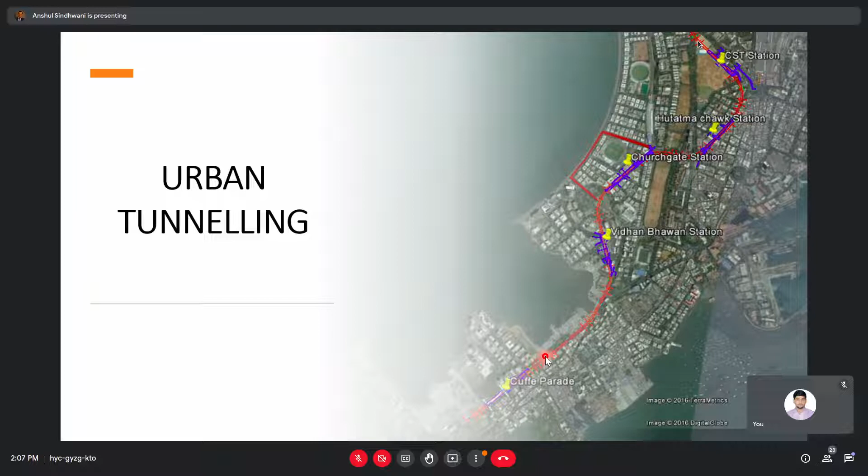If you see on the right hand side, this is the alignment. I'm mainly talking about the Mumbai Metro, but I have experience of a few other metro projects too, so I'll be speaking in general about the challenges and works associated with underground tunnels. This is the Mumbai Metro package one, Cuffe Parade, Vidhan Bhavan, Churchgate, Hutatma Chowk station, and you can see the Arabian Sea is very near to one specific location. In general, the entire alignment is very near to the sea, so there's a predominant challenge that water could be a big issue in our case scenario.

So what exactly is urban tunneling? There are different applications associated with it. We have metro tunnels, we have transportation tunnels. Within Mumbai itself, all sorts of applications of tunneling are currently being executed. If I talk about metro, we have Mumbai Metro Line 3.

If I talk about transportation tunnel, we have a coastal project running below the Marine Drive. If any of you have seen Marine Drive, it's basically below the sea. We are building a tunnel with a diameter of 12 meters. L&T is building it, so it is one of the largest TBMs being deployed at the project. Then we have utility tunnels being executed currently by MCGM for water transfer and sewage. So all sorts of applications are there.

Then we also recently started with high-speed rail in Ahmedabad. It is again a big project, yet to be started specifically for the tunnel, and we'll be having one of the largest TBMs of India deployed as on date, around 14 to 15 meters in diameter. So all sorts of aspects are there.

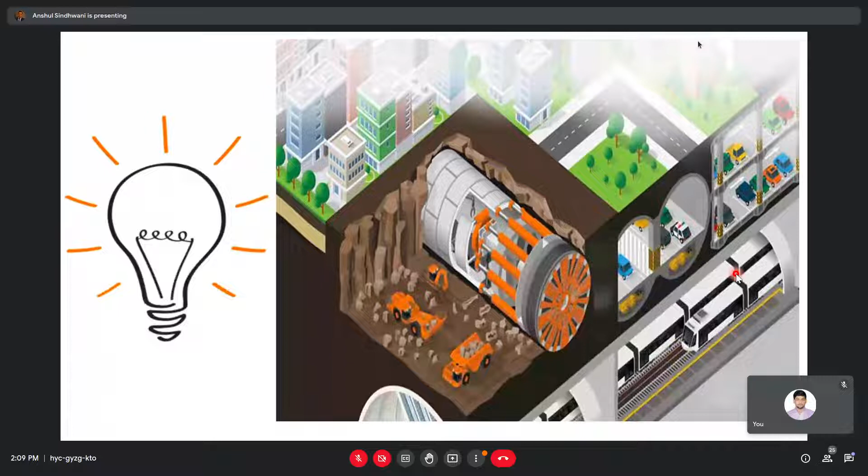Today I'm going to cover metro tunneling in general. The major facts we need to remember before, or for any application of tunneling project being executed in urban areas—what are the main key points? The ground surface is a unique challenge which we need to keep undisturbed, because the public is staying on top; if there is any settlement, everyone will be in a panic scenario, and there can be very serious consequences.

Then we have utilities—specifically in Mumbai, we have utilities where even the owner doesn't know which utility is going from which location to which location, because it was laid around 80 or 90 years back. So it's a big challenge which we need to see.

Then we have a risk mitigation plan. Even though there may be a settlement or ground issues happening, there has to be a risk mitigation method at the same time. Before starting the project, we need to have a plan for if a scenario is happening, what is the probability of that event, and what is the risk mitigation plan in advance, because we are working below existing buildings and on live traffic roads, so it can have detrimental effects.

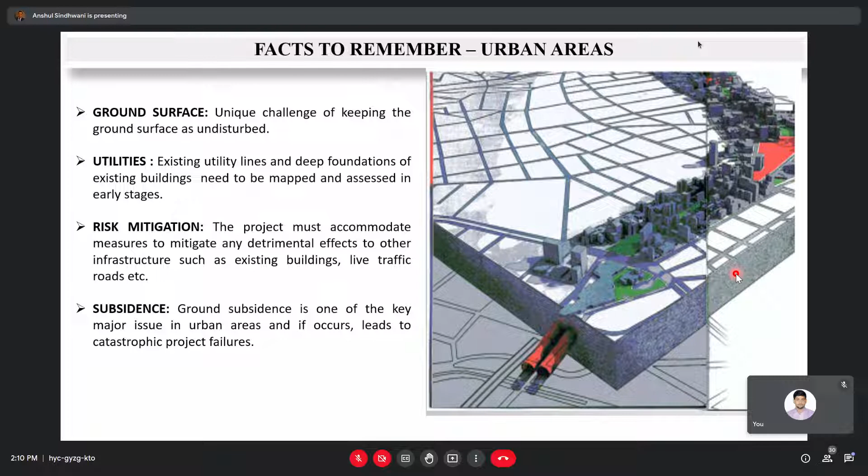Then there's subsidence, which I've already talked about. It is one of the key major issues in any urban area. I've worked in many cities, and everywhere the problem still remains the same. Although, if we have a risk mitigation plan in advance, we can always avoid these project failures.

Talking about ground subsidence, you can see these images from top to bottom, left to right. Everything is involved in and around the urban area. On the right hand side top, this is Bowbazar in Kolkata. Recently some issues happened last year during the pandemic. On the left hand side, both images are from Chennai Metro Phase One, and this one is from a foreign project.

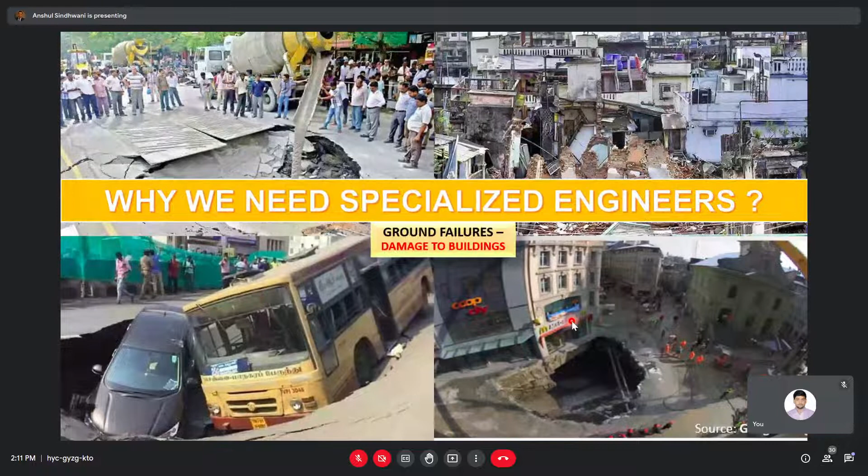What you can see is that the public is involved, buildings are there, traffic is there. So at the end of the day, it's a risk to the public, and we need to avoid that. How can we avoid that? We need specialized engineers, from mining, mechanical, civil, geology, geophysics. Every engineer makes up a team to make the project a success.

I'll start with the typical stages of construction within urban tunneling. We have a retrieval shaft and a launch shaft. You can also call this station one and station two. One station is the launching shaft, where we'll lower the TBM, and the other is where the TBM will be retrieved. At the end of the day, you will have access as a passenger from this side, and access as a passenger from the other side as well. So basically, there are two stations.

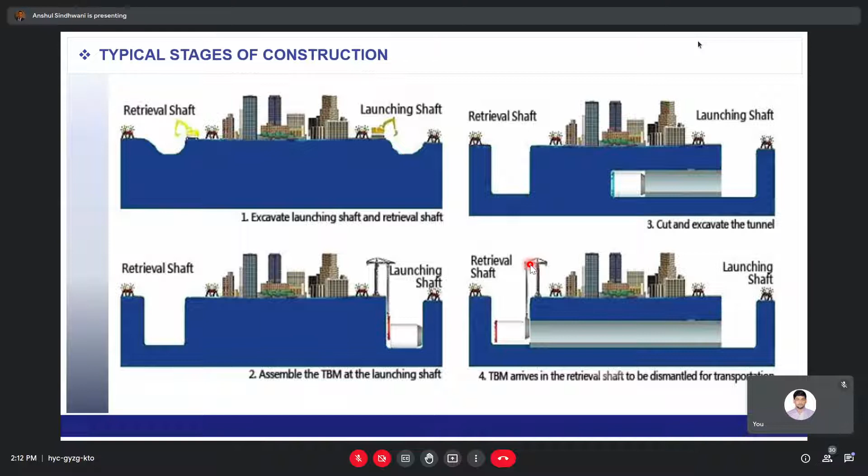How do we do it? Step by step, you need to excavate the launch shaft and retrieval shafts. Once the excavation is done, you lower the TBM, assemble it, and drive it. Once the drive is completed, you retrieve the TBM. This is the basic stage of construction usually followed everywhere across India and across the world.

So the basic layout, talking about a station, has a launch shaft and retrieval shaft. These shafts are just part of a station. This is a cut and cover box, which we call an underground station, where you'll have access at a later stage to enter and go from one place to another. At each end, we'll have either a launch shaft or a retrieval shaft. Specifically in urban areas, in most cases we'll have buildings on both sides, left hand side and right hand side.

If you see the bottom image, it's a section indicating the excavation stage, where, like in case of Mumbai, we have a rocky strata. Up to the point where this rock starts, we'll have pile systems, which we call retaining walls. It can be a secant pile wall or a contiguous pile wall, depending on the ground in different cities. Specifically in Mumbai, we've used secant piles, which we bore up to the rock, and then from rock level we'll have an open cut excavation.

Then you can see the westbound tunnel and eastbound tunnel. Basically, two TBMs will be driven from these locations.

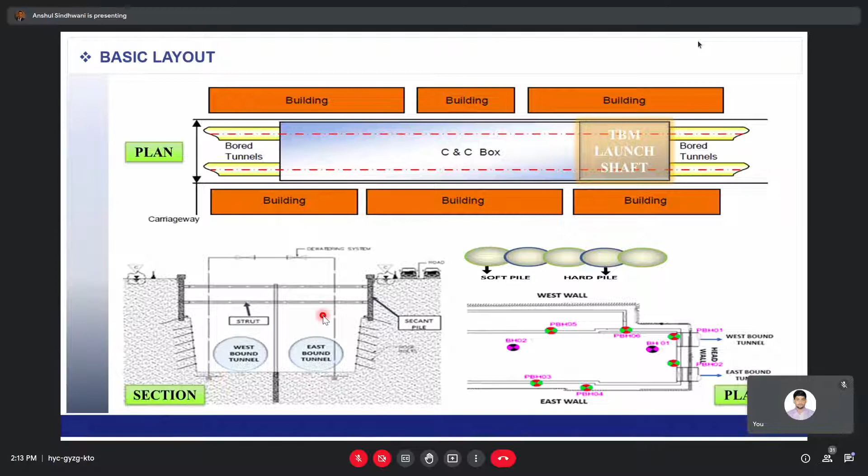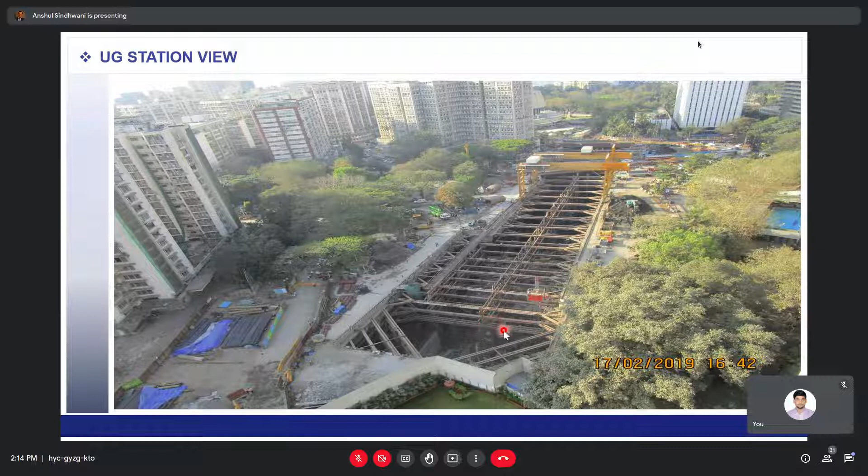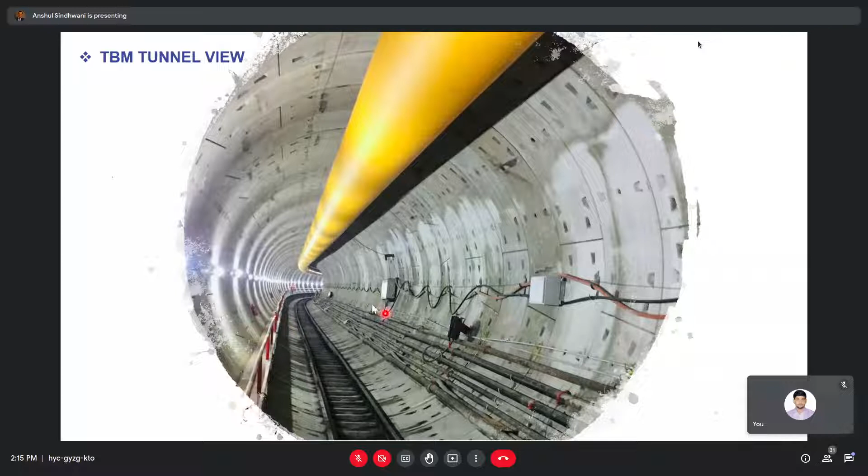Like I have specified in the previous slide, there are a lot of engineers from different backgrounds which make one team. We need people from geology, civil, mining, mechanical backgrounds to form the composition of one team which can drive the project.

If I talk about the specific activities where we exactly need them, we have a topographical survey where buildings, roads, trees, manholes, poles, and cables are mapped for future reference. Also, when we are building or excavating anything, we need an exact location of where this particular building is, how far it is from the center line of the tunnel or from the station edge.

Moving on to the next activity is geotechnical investigations. We do geological and geophysical surveys during different stages of the project depending upon requirement. Geological mapping is done for the open slopes and specifically along the face of the TBM.

We also have a building condition survey, just to see the condition of buildings next to the project location. Then we have instrumentation, and station and tunnel construction. I'll be talking about all these activities in detail in the next slide, so you can wait a while to understand exactly what I'm talking about.

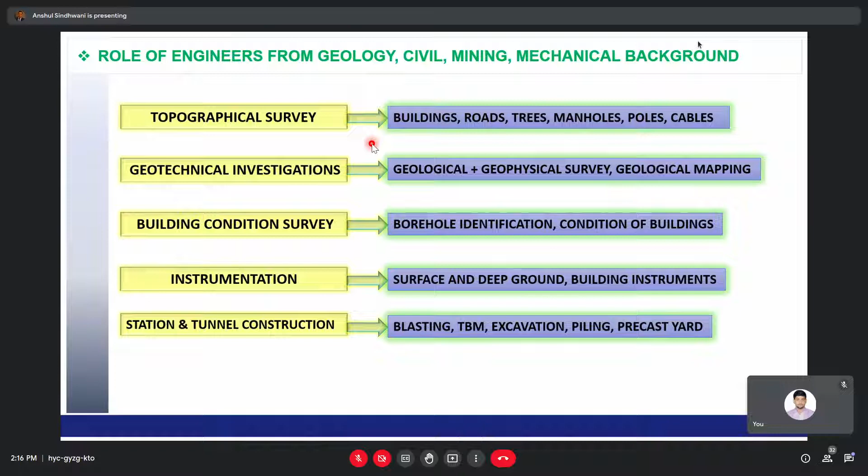Many of you, since you're already from a tunneling background, might have basic knowledge of this, which I'll explain through this urban tunneling case study. The previous section talks just about the activities - this is a sequence I have created to understand how exactly we start the project.

So for any project, first we do the topographical survey - if you see the right hand side image, everything is marked. Then we do geotechnical investigations and building condition surveys. If you see, different numbers are allocated to different buildings.

This is a unique identification number we create so that when we start the project, we understand how exactly this building is - how high it is, how many floors, what is the foundation - so that whenever the TBM is passing through, we understand in advance what precautions we need to take care of. Then we need building repairs and support.

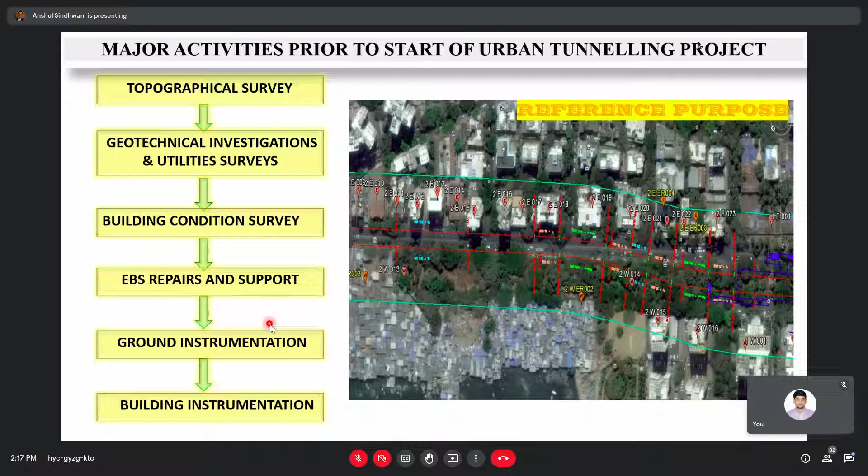Like I said, there may be cases where the building condition is not good, so we need to have some repairs and support as well. Then we have ground instrumentation and building instrumentation.

For the geotechnical investigations, you might be aware of the basic drilling procedures and laboratory testing we do. I'll be talking about those things in a bit more detail in the TBM selection part.

These images are shown just to indicate how exactly geotechnical investigations can help you plan for tunneling performance, or to understand how much probability there is of ground failures happening. I have created these images in a sequential manner so that once we are moving from station one towards station two, we can see how exactly the geology is changing.

If you see the first image, what we can see is above the TBM top ground. There is a layer named shale with tuff bands, whereas our TBM tunneling is in grade one, grade two, grade three basalt only.

However, as we move further, what we can see is along the longitudinal direction, this shale and tuff band is dipping towards the tunnel alignment itself, and it is moving down. So this particular case scenario is ideal, where we don't have any soft rock, or I should say fractured rock, in the face of the TBM.

Whereas on the other side, this particular image shows it becomes a mixed face. The point I'm trying to bring out here is, if you don't do investigations with proper planning, you will end up with something else which is not exactly what is being mapped during the tunneling stage itself.

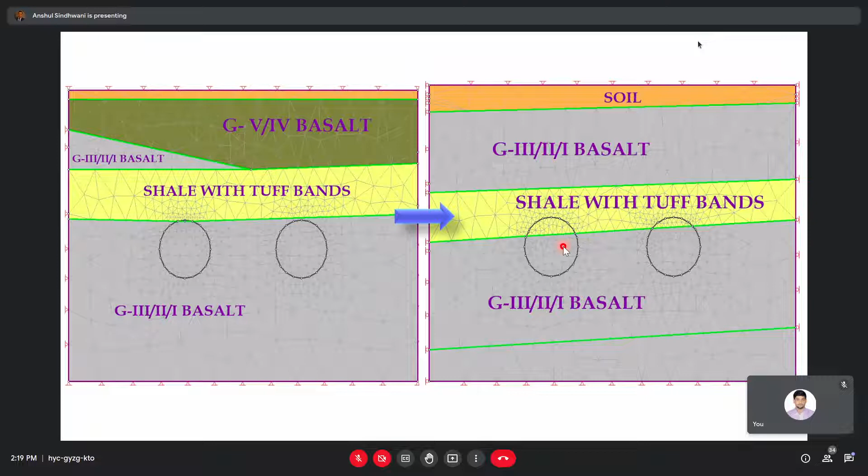So these are the two images. If we move further, you can see this layer has gone below the invert. If you go back from the first image and interpret up to this image, as we are moving forward from the TBM, this particular fractured ground is dipping downwards, going down, down, down, until it goes below the invert of the TBM. And then in the next image, this has disappeared completely.

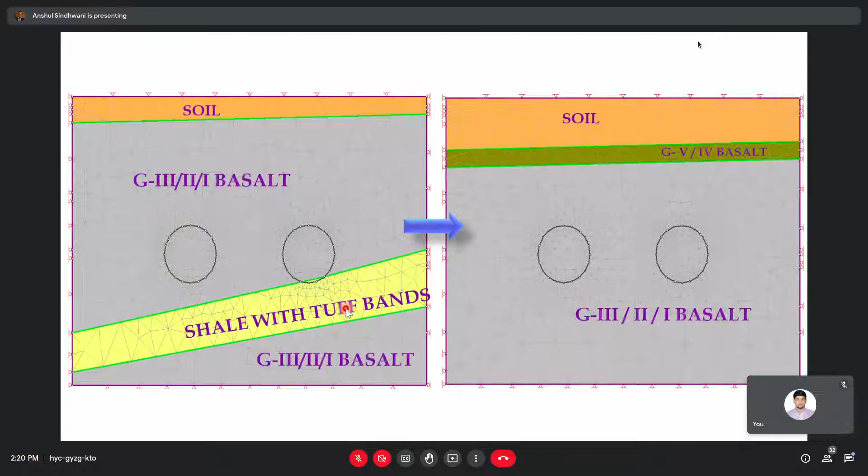In actual ground, it would have gone beyond the borehole depth. Within this borehole depth of 30 meters, it indicates that this layer is no more. Now, as we move further, there is another section where this particular fractured rock has appeared again, but with more fractures in it. And then if you move forward, there is another layer which has added to it.

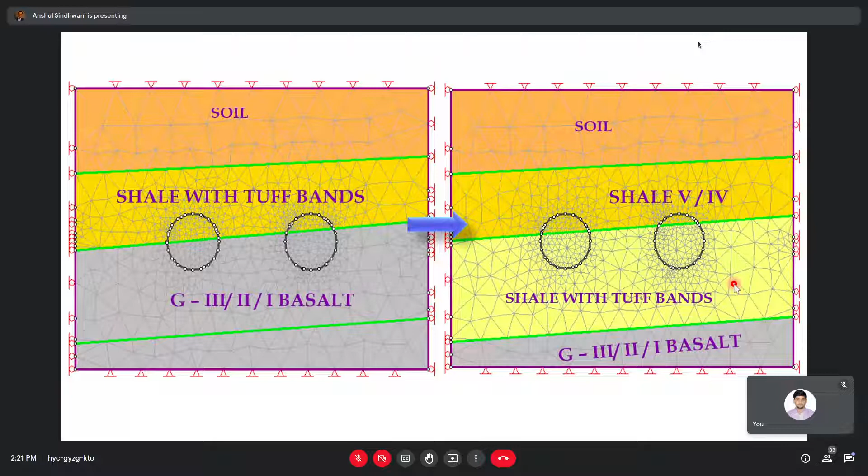In real terms, this is just a 500 to 800 meter alignment I'm talking about, and within that 800 meters of tunneling, you can see exactly how the geology is varying. So the point to bring out here is the importance of investigation. If you don't have a detailed understanding before you select any TBM, it would basically be a plan for catastrophic failure later.

So now I'll talk about the TBM selection part. Here I'll talk about which exactly are the parameters we look for during the geotechnical investigation stage. In Mumbai, we used a crossover TBM, which is a dual mode TBM, first time being deployed in Indian conditions. I'll tell you the difference between the TBM we are using and in general how it is being used. This is just a general classification of TBM types, which most of you might have already studied. We have rock type TBMs and soft ground shield TBMs.

Specifically in Indian cities, the majority use EPB and slurry shield TBMs because of the soft ground conditions. But cases like Mumbai and Bangalore use rock TBMs quite a bit. Majority of cases use only EPB and slurry shields, which can also be used in specific rocky conditions, but for Mumbai specifically, majority have used rock TBMs because we are working in Deccan traps, which is dominated by rocks.

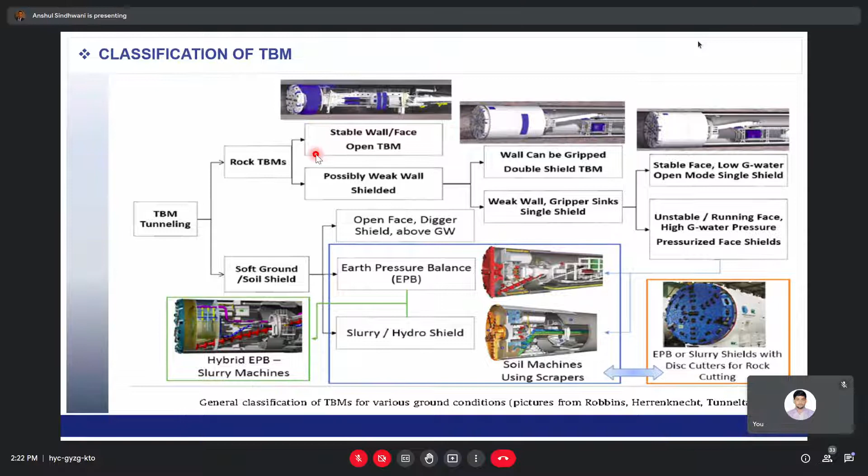Now, coming to the parameters most important for TBM selection, there are two categories. One is ground condition, and second, based on these ground conditions, the TBM operational parameters we look for. In ground conditions, we have intact rock characteristics and rock mass conditions. For intact rock, we need strength, toughness, hardness, drillability, brittleness, abrasiveness, Poisson's ratio, elastic modulus, and more like porosity and grain size, which are basic to it. And then rock mass conditions.

In cases like urban tunneling, you don't get to see these rock mass conditions because there is no rock mass exposure. If you go to any hilly terrain, you can map the slope next to the tunnel alignment and have some sense of understanding. But in urban tunneling, all you have are boreholes going down to the tunnel alignment. Anyhow, basic things you can understand, like exactly what the spacing is.

It could be referenced from the RQD which we calculate, it can be related. Then the dip amount - generally we get to know the amount of dip from the core, how much angle it has with respect to the horizontal. So basic things you can understand, but unless you have exposure, it's hard to get before the project starting stage in urban tunneling.

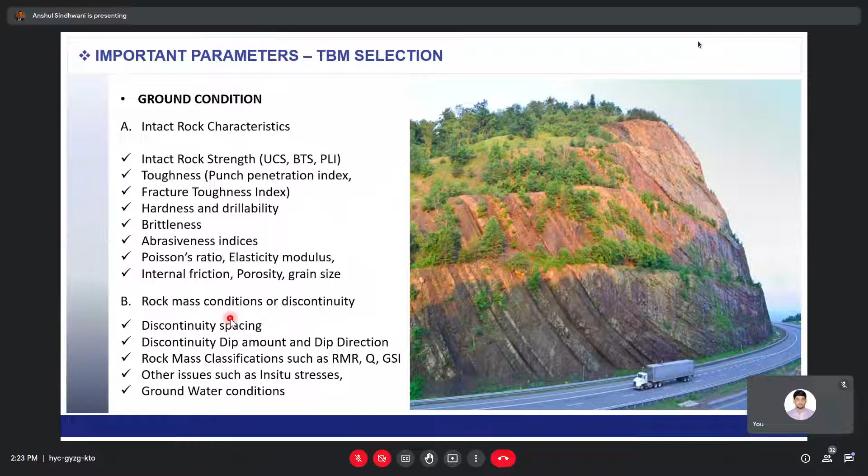Now, moving on to TBM operational parameters - thrust force, torque, RPM, power - these are highly dependent on the ground characteristics. Unless we have an idea of the previous section, we cannot get into these parameters. But as a holistic view, these are the parameters we look for.

Number of discs - if I talk about a very specific case scenario, the disc cutters we are using in Mumbai are 17-inch disc cutters. It is fair enough for rock of strength up to 150 MPa, but in cases like Bangalore, where we have very hard quartzite rock with very high abrasivity in nature, the experience in the phase one Bangalore project was that 17-inch disc cutters didn't work well.

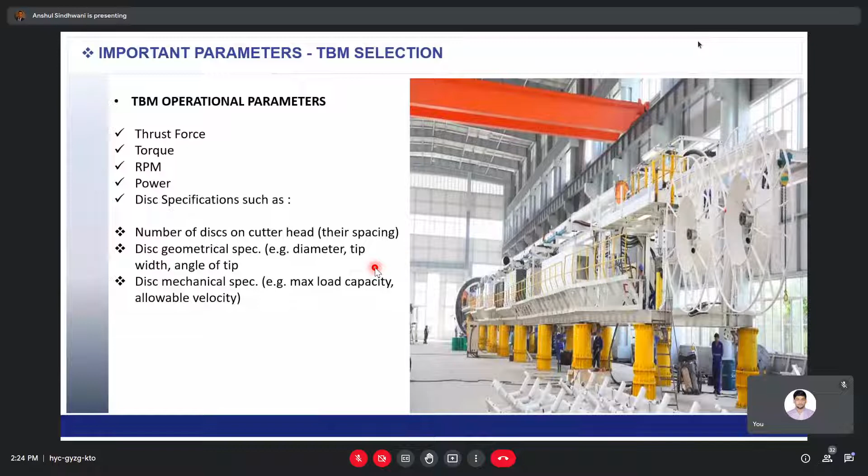So this time, as an L&T, we are using 19-inch disc cutters. So that is how a dependency on these disc cutters can have on individual projects.

So what we are talking about in terms of key parameters when we look for any TBMs: what is the maximum advance speed penetration? This will reflect the planning of our tunneling construction schedule. Until we have values attached, this comes only when ground characteristics are available. Then what is the range of speed of the cutter head, the main drive torque range, power of main drive, total thrust force, total number of cutters, how many gauge cutters, how many face cutters, how many center cutters. All these details you need in advance.

So you might be aware already there are many TBM manufacturers. I've named just a few which are mainly involved in Indian tunneling: Herrenknecht, Robbins, Terratec, CRCHI, CREG, Lovsuns. In fact, I've worked with at least three or four of these, and these are the major players I've seen personally in India.

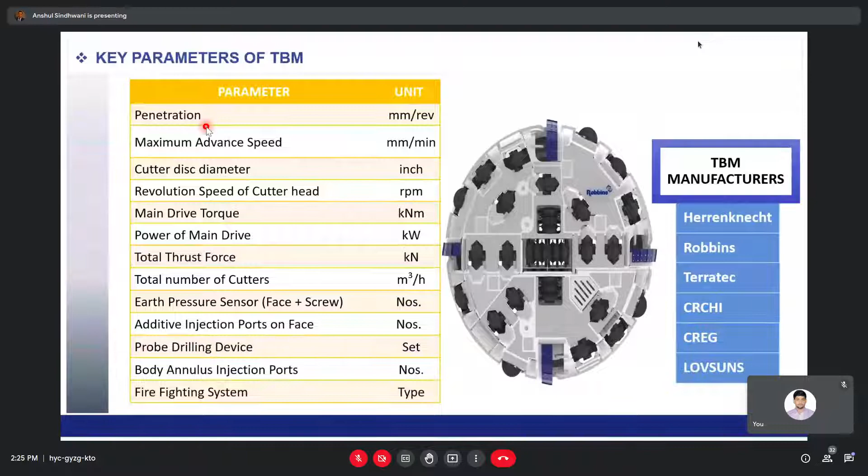Moving further, as I said, these key parameters are basically derived from the ground characteristics which we get. Technically speaking, there is a back calculation for how much advance you can do within a day, a week, or an hour, based on these TBM performance prediction models.

But personally, what I've seen in the construction industry is that the construction schedule is way beyond these performance model parameters, because it is more dependent on logistics than on mucking. Like in the case of Mumbai, our muck is disposed 60 kilometers away from the project site. So even though we have more mining meterage in advance, we still won't be able to dispose of the entire muck, and therefore the TBM will sit idle.

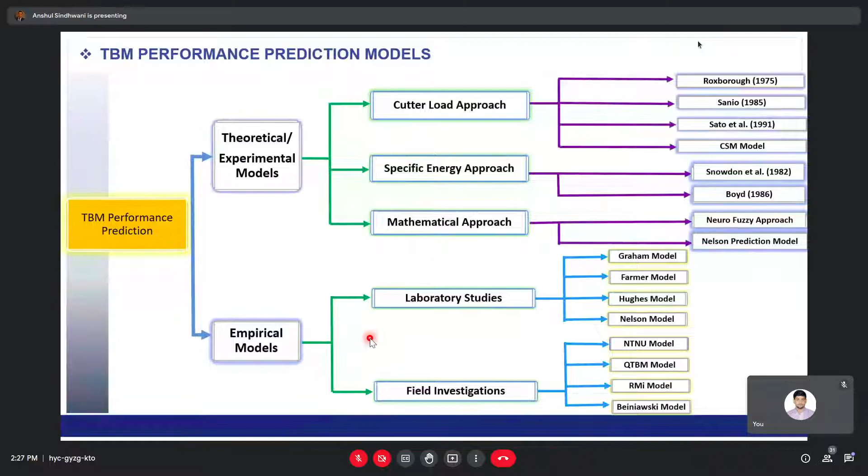But in any scenario, if you want to have a rate of penetration or advance rate in advance based on ground characteristics, you can use these models. There are theoretical, experimental models, and there are empirical models based on laboratory and field studies. You can use a combination of all of these based on the availability of ground parameters that you have covered in the investigation part.

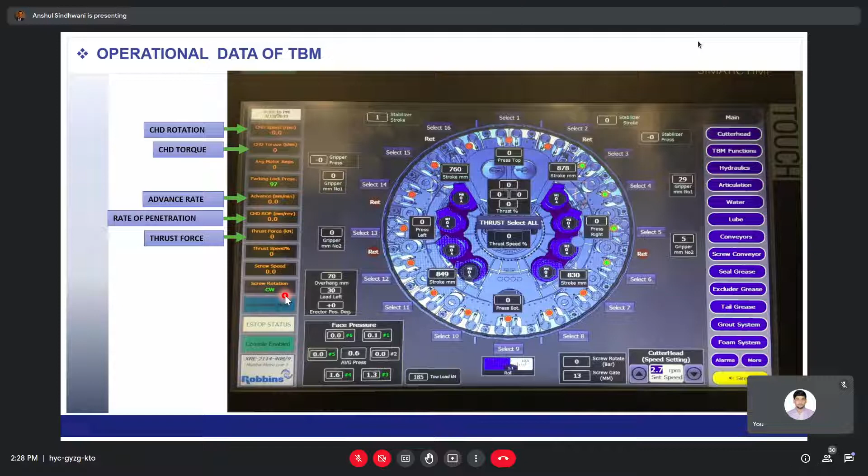So this is just a different view. I've taken majority of the parameters which I listed in the previous section, and they're again noticed here: cutter head speed, torque, then you have advance ROP, thrust force. So whether you're a mechanical engineer, a mining engineer, or a geologist, these are the parameters that can give you a lot of idea of what exactly is happening ahead of the face and within the face itself.

So moving on to the next topic, it might be a unique or different topic you might not have studied as of now. Building condition survey, as I've spoken earlier, is basically to understand the existing condition of a building before the start of the project.

If you don't do a survey of these buildings, you cannot go out and execute the project, because people will come and say, 'Because of this metro, our buildings are shaking every time,' which might be a case, or may not be. That is what you need to identify in advance, which we call structural audit and building condition survey. I'll speak about this in detail now.

The first activity when you go into any project is the tunnel alignment. You mark a 50-meter zone from the center line of the tunnel towards both ends, westbound and eastbound. This 50-meter zone is the influence zone written in the contract of every underground metro project across the world.

This basically means that even in the worst case scenario, with soil ground conditions having flowing ground, the maximum extent it can affect is 50 meters. So this 50 meters is taken as the worst case scenario, that whatever the ground conditions beyond this 50-meter zone, they will not have any impact.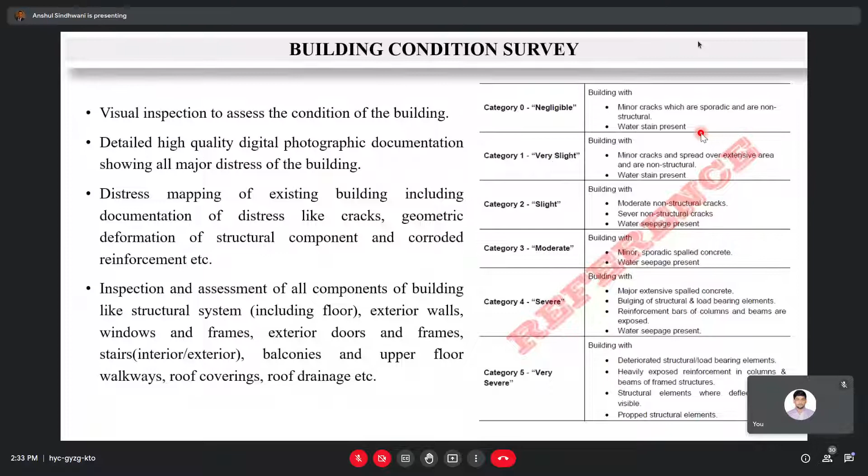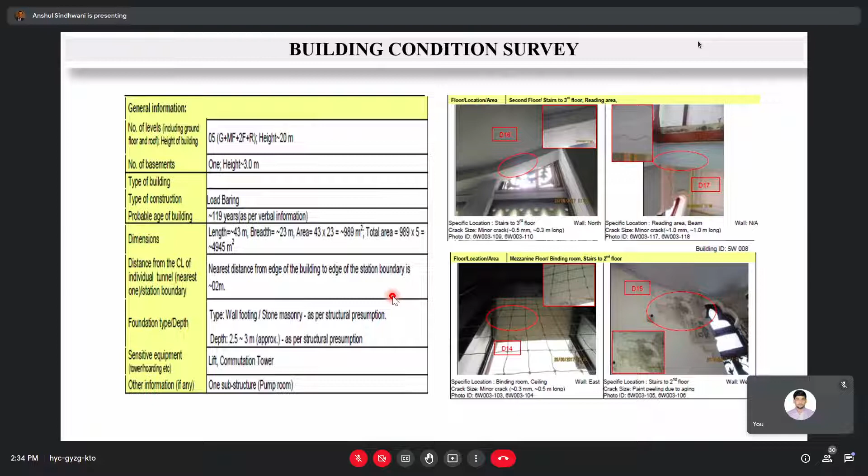At the same time, these are the same parameters I talked about - distance from station boundary, foundation type, depth - again a structural presumption. If we don't have details available, we do physical checkups of the foundation. I'll show you in the next slide.

In Mumbai specifically, we have heritage buildings to deal with, which are almost 120 to 150 years old. Nobody has the detail of how exactly the foundation is. So our designers have marked it specifically by digging a trench. They have come and visited and seen what exactly is the type of material used in the foundation. For heritage buildings, this is the sort of foundation they have used. So this is also a way to do it.

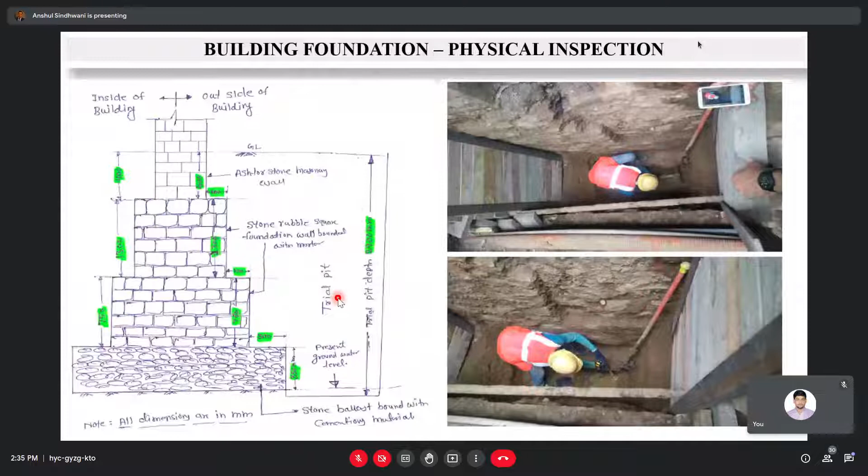Nowadays, if we have high-rise buildings in Mumbai, we know it will definitely be on a pile foundation. So some basic understanding is also required. Otherwise, trial pits are always the best way to understand what exactly the foundation is.

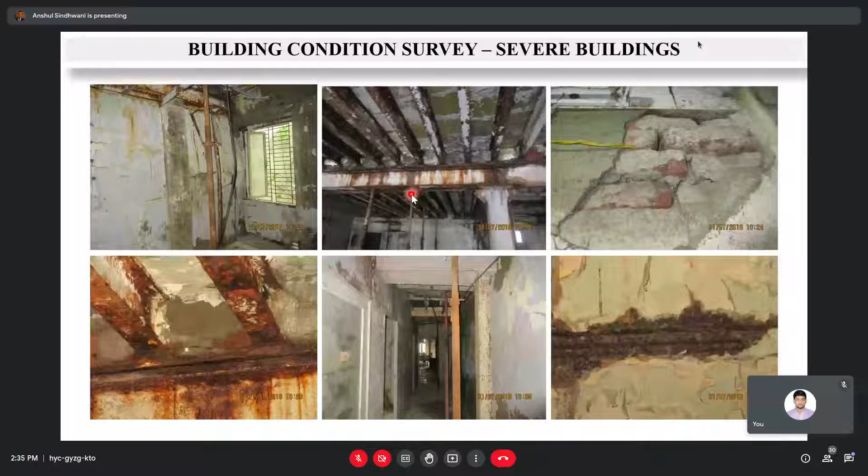So I was talking about severe buildings. You can see these damages we have identified in some of the buildings and categorized as very severe. You can understand that without even any project construction, these effects already exist. Imagine if we have a tunnel below these buildings, what adverse effects it can have on them.

So this is again one of the important categories. Along with the buildings, we also need to identify these bore wells or wells in advance. Many cities like Delhi, Chennai, Patna or Ahmedabad have bore wells within every building for water supply. When we plan these alignments, nobody knew that these bore wells are next to the tunnel alignment or in front of it. So these bore wells need to be plugged before the TBM arrives, and we need to have a separate arrangement for the owner. In case of Mumbai, we don't have bore wells because we have rocky strata here, but...

We do have many holy Parsi wells, which are open wells without any foundation. They are basically within the sandy or soil strata of the ground, and open from the bottom, so you can have ground seepage when tunneling. These wells you cannot do much about because they are holy wells. Since it is rocky strata in Mumbai, usually the probability of any ingress happening within the well is less, but these still need to be monitored. In case there is a seepage within the TBM, the water level will go down, and people will panic. So the point here is these bore wells and wells need to be identified along with the buildings when we are doing this building condition survey.

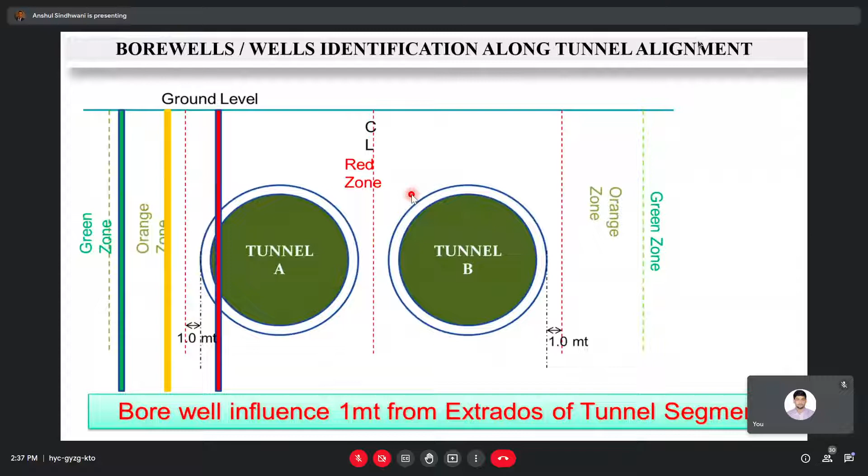So I was talking about the structural audit. We usually don't do a structural audit for every other building, only for buildings that we feel are very severe, very near to the tunnel alignment, and will have an impact for sure. What we do is ultrasonic pulse velocity test, then rebound hammer test - people from civil engineering can relate to these tests. Then we have a carbonation test, then a half cell potential test. Basically, we go inside the building, take a core from the concrete, and do some testing to come to a conclusion on how severe it is.

At the same time, the detailing of the cracks which we have done in the building condition survey - this is the advanced version where you see the extent and the exact critical component of that building marked, which needs to be treated. So basically, the structural audit doesn't just tell you the condition of the building, but also where exactly you can do additional propping or repairs so that the building can have substantial strength to allow the project to proceed. If you dig below this building, we know there will be an impact for sure, so we need to determine what additionally we can do so that we can do the tunneling. Some supporting and repairs are required - this structural audit tells us where exactly you need to prop or repair it.

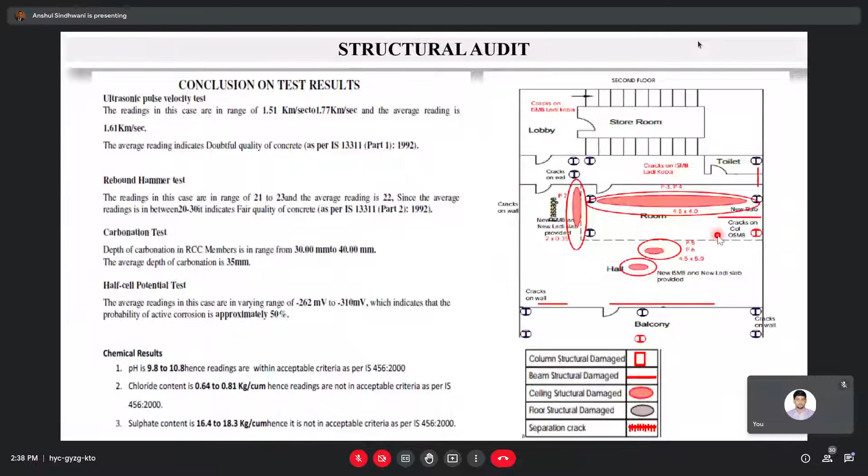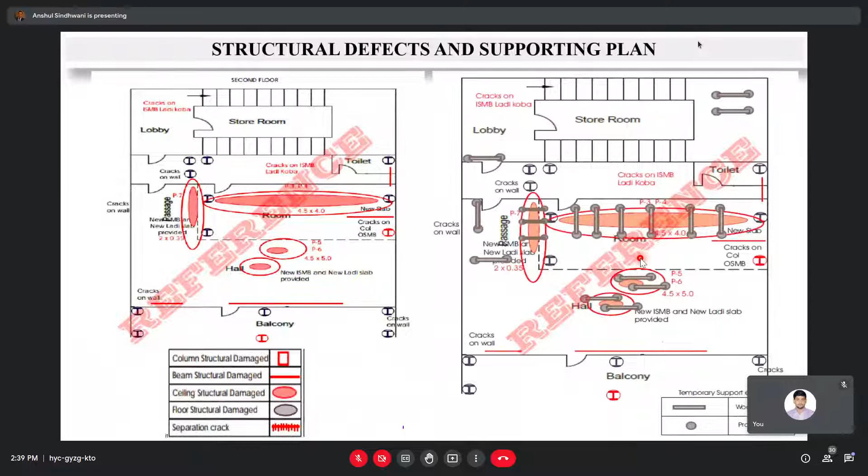Once this building condition survey is done, identified defects completed, and ground investigations completed, we do the ground movement and building risk assessment studies. This is the second stage. Think of it this way: we have buildings with their own condition, and we have ground which is of a specific type. When we do tunneling, these two things basically interact.

If it is a soily ground and these buildings are already in a severe condition, tunneling in soil ground will have a tendency to settle more. Whereas if you have a rocky ground and the building category is still critical, you will have less impact because the ground is strong.

In this particular case scenario, we do the ground movement studies and then we categorize these buildings through a risk assessment approach, where we identify what exactly the ground will have an impact on the building.

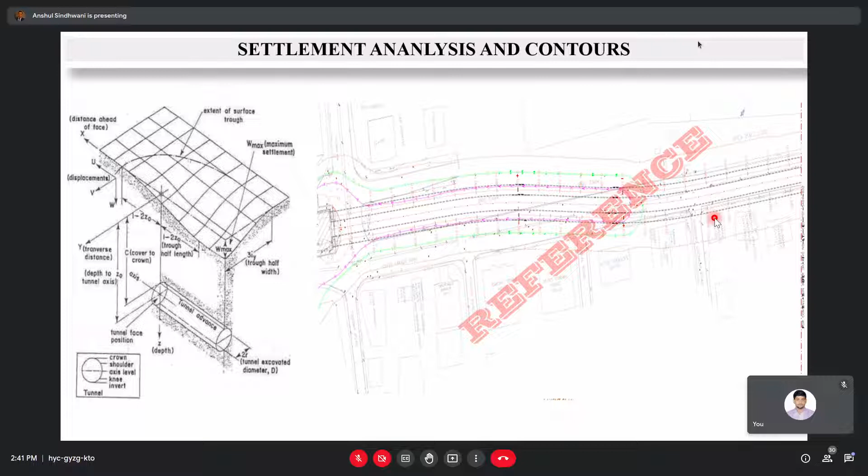Now imagine if you have a building here with a 1 mm settlement - even though this building is in a severe category, it will not have any impact. So this is what we do in settlement analysis and contour plans. We mark these contour lines all along the tunnel alignment, and then identify which buildings can have an additional impact based on our construction.

This is the building risk categorization I was talking about. Based on this categorization, I plan my instrumentation, ranging from negligible to very severe category. Green indicates no preemptive measures are required and we can have a basic instrumentation plan, whereas the red category indicates the building is so bad that we need temporary or permanent evacuation, or in some cases demolition of the building if required.

If demolition is not possible, we need enhanced instrumentation and monitoring - it could be a real-time approach or a different way of doing it. Then we need a temporary repairs and support plan, which I discussed in the previous slide. This approach gives us a plan for doing instrumentation within these buildings and what support is required.

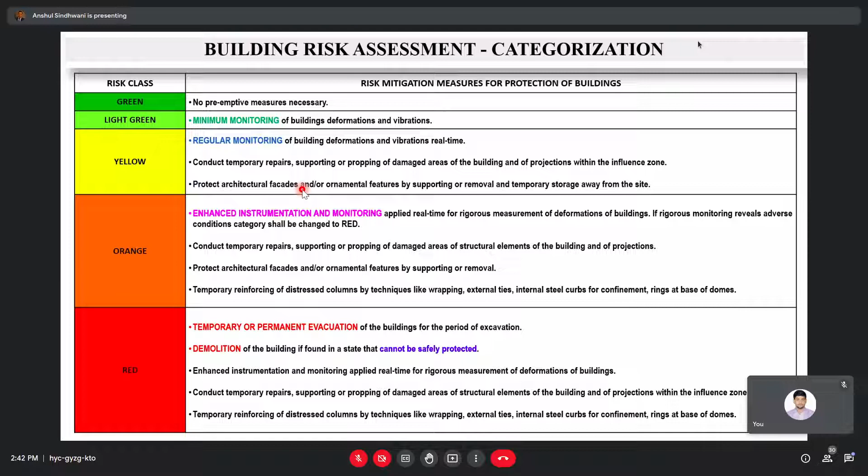Moving on to building support and repairs. Imagine you've done the studies already and concluded that supports are required within this building. What sort of support? On the left hand side, this wooden batten I was talking about in the previous image, discussed during the structural audit, is being supported here.

We have heritage buildings here, with a station excavation up to 30 meters. This building is just 2 meters away from our secant pile alignment. These arches have a tendency to either converge or diverge based on the excavation - this is the probability we thought may expose this issue. So we have supported these arches using I-sections, ISMB sections, so that it can have structural strengthening.

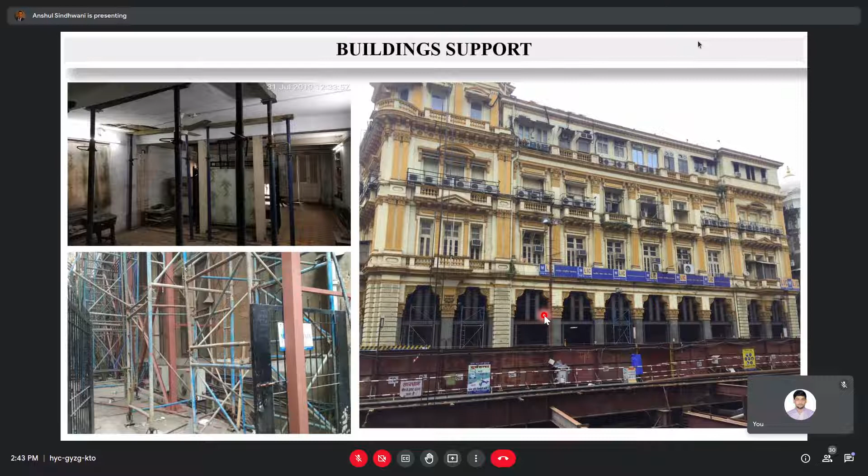I was telling about the heritage structures of Mumbai - you can see we have these finials. These are UNESCO identified heritage buildings, so they have a unique finial or structure type. These finials are being supported by putting some counterweight here. The same thing is done here - this is just a bird's eye view.

This is a close view of the arch support, and this is a projection that people building the heritage structure added long back. These projections need to be supported because, imagine, we have done blasting just next to these buildings, so these projections have been supported so there will be no fall below.

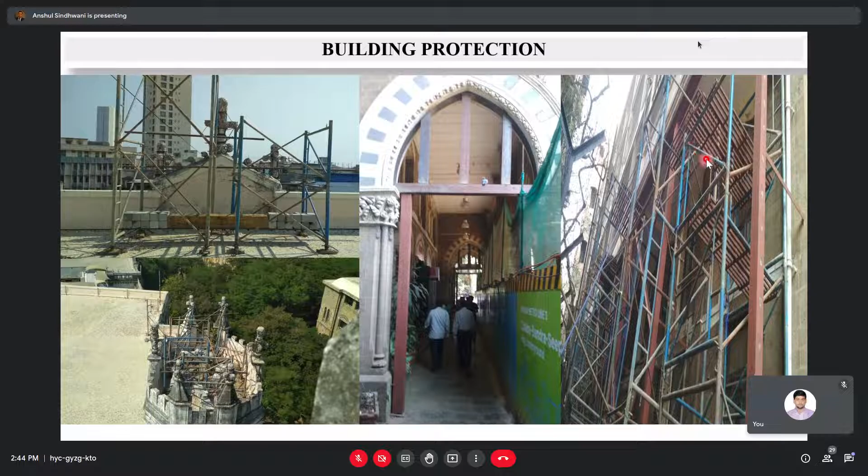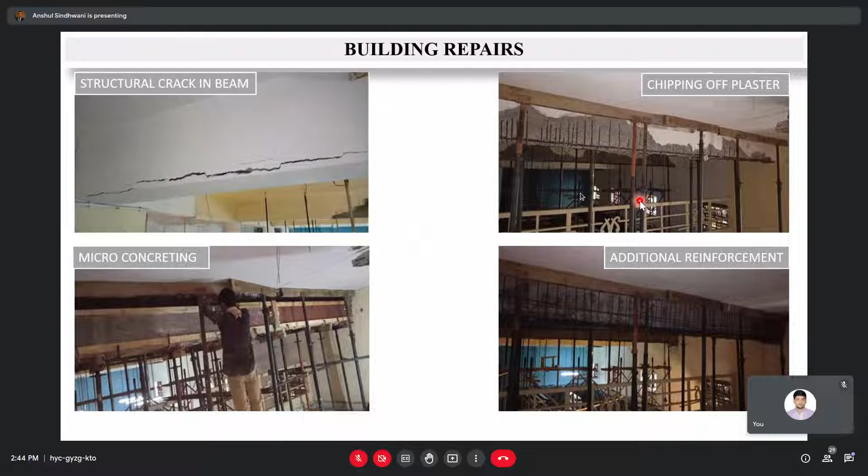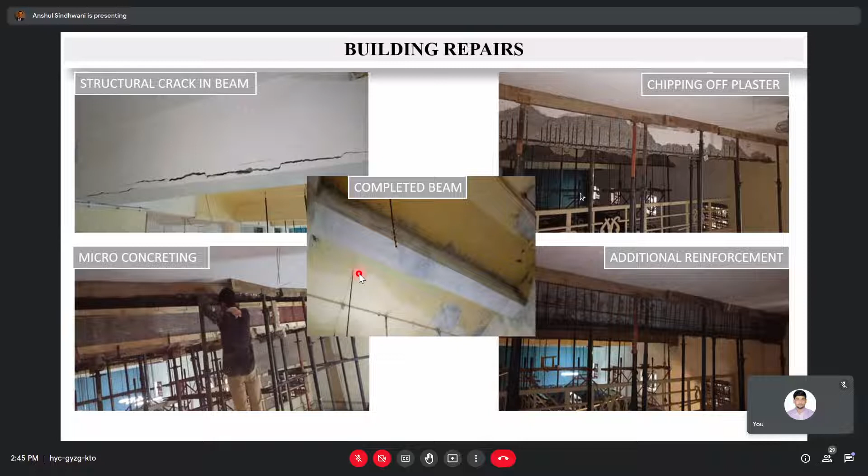We have also done repairs for a few buildings which we concluded were very severe and would cause further deterioration to the structure. So why not repair it in advance? This is a basic path flow in any underground project. There was already a structural crack in a beam, which is major for any building since these beams take the load. So we chipped off the plaster, did additional reinforcement, and did the concreting. This is the final result. You can imagine how deeply we need to dive in just to save the public and make these buildings safe and free from any effect due to construction.

Now I'll talk about the instrumentation and monitoring part. This is divided into different categories, in the sense that we need to monitor buildings in the vicinity, but at the same time, what we are digging for stations also needs to be monitored, like the open rock cut slope, piles, retaining walls, and struts in between. All these structures need to be monitored because the workers inside the station also need safety. If anything happens within that station, it will ultimately impact the buildings in the vicinity.

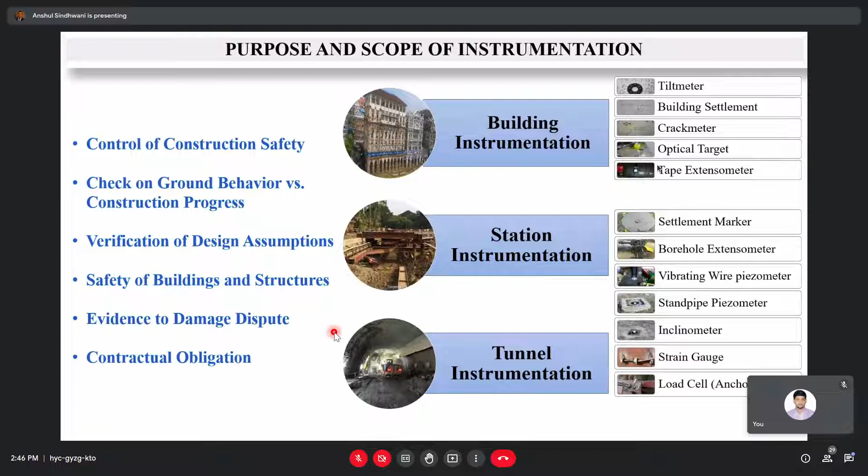And then we have tunnel instrumentation. The basic objective of doing this instrumentation is construction safety, checking ground behavior and construction progress, verification of design assumptions, safety of buildings and structures, and evidence for damage disputes. This is a major thing because people tend to say that wherever metro works are going on, any damage is only because of the metro. That's not usually the case every time, so this instrumentation data gives evidence for any damage dispute in the future. And then it is also a contractual obligation.

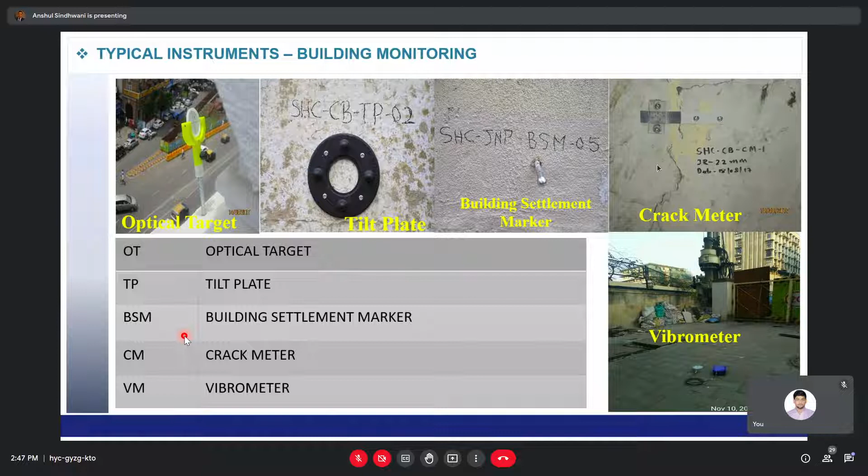So for buildings, what exactly are the instruments we use? These instruments remain the same; the point is whether you do it manually or real time, which depends on the project. In Mumbai we have done both manual and real time, whereas in Chennai and Delhi it has been done mostly in manual mode, but for some specific critical buildings we have done real time as well. So the point is, what exactly are the types of instruments we use?

First is the 3D target, which gives you a three-dimensional view or three-dimensional coordinates of the building wherever we usually install it. Let's say if it's a 10-floor high-rise building, you put it after every 3 floors — so at 0, 3, 6, 9, and then on the roof.

Then you have a tilt plate, which is basically for bidirectional understanding of a building. Let's say if you are doing excavation in front of a building, there is a tendency for the building to tilt towards the station direction. So we install these tilt plates. It gives you a two-dimensional view — it gives you this view as well as this view also.

Then we have a building settlement marker, which we install to give you a direction in Z — it gives you a level. If there is a settlement, this level will change.

Then we install this crack meter. If you remember, I talked about crack identification during the building condition survey. So those cracks identified in these buildings, before construction, we install these crack meters because we need to know during the construction stage if these cracks are getting widened or not.

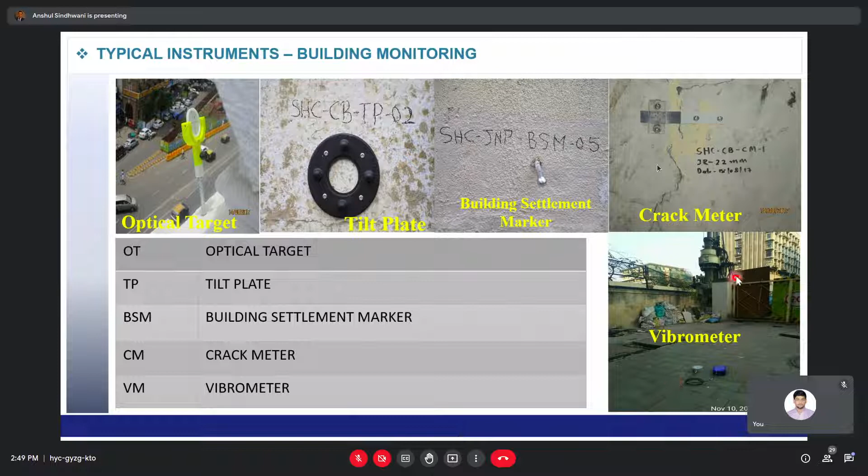Then we also use a vibrometer, which is basically a micrometer to monitor vibrations. We do piling just next to the building boundary, and when we do piling in hard rock, it creates a lot of vibrations, so we need to monitor these. In fact, during excavation for blasting, we also do this.

So station monitoring — this basically consists of monitoring the structures within the station and the ground beyond the station.

This particular slide talks about the ground beyond the station boundary. We do have either roads or, in some scenarios, open ground. So we install pavement markers on roads and soil settlement markers on ground.

Then we install standpipe piezometers to understand the water level. Maintaining the water level in the city is a very critical challenge, and it's a contractual obligation that due to our excavations we should not lower the water table, because it will have a major impact on the buildings in the surrounding. So we need standpipe piezometers everywhere to understand the drawdown if anything is happening. In case it is happening, some wells need to be dug and additional work done.

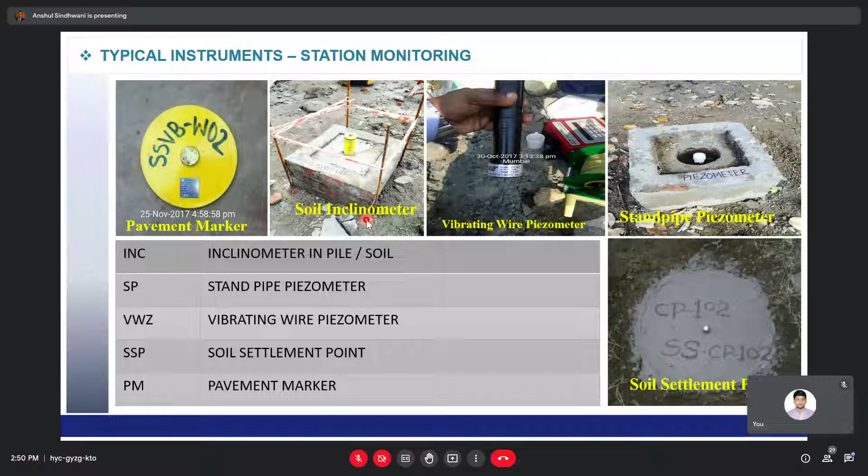We also measure pressure through vibrating wire piezometers, calculating pressure in MPa - the water pressure there - because if height decreases, water pressure will also change. Then we also have a soil inclinometer. If there is a deformation at any point, we get to know through inclinometers. So these are basically the instruments we use beyond the station boundary within the ground, which we can also call deep ground monitoring.

Whereas in tunnel monitoring, the same type of instruments are there, except we also use extensometers, called multi-point borehole extensometers, to understand deformations at different levels. Let's say our TBM tunnel is 15 meters below ground, so the crown is below 15 meters. We can have multi-point extensometers at different levels, like 6 meters, 9 meters, and 12 meters, so you can get understanding at different depths.

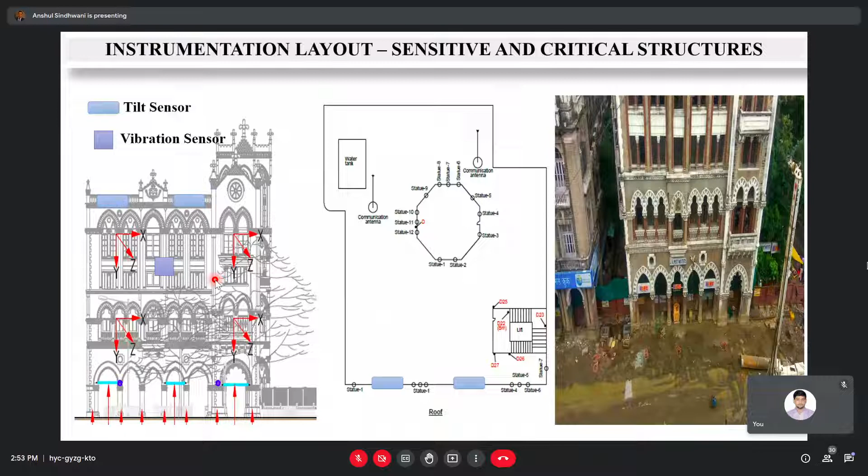You can see these blue marks - it's a tilt meter which we use to see if there is any tilt in the building or not. This is just a basic view showing within a single building how these instruments have been placed. The same has been marked also, if you see. Tilt sensors we usually put at the ground and sometimes at the roof as well, because the roof is majorly, when there is any tilt happening, the worst affected zone.

For these instrumentations, we have different review levels as well - an alert level, action level, and alarm level. Just imagine you have a rocky subsurface, consisting of bedrock, competent rock. The allowable settlement for any building is based on the contours plan I've shown earlier. Just assuming 10 mm of settlement is the maximum allowable settlement for any building, then 50% of it is the alert level, so 5 mm is the alert level zone. 80% of it is the action level, so 8 mm is the action level. Then you have the alarm level, which is 100%.

So what we do is, when any instrument reaches the alert level, we increase the frequency of monitoring.

Frequency of monitoring depends on project to project, but in a general case, during excavation it has to be on a daily basis. Once the excavation is done, the frequency can be decreased. In case the TBM is passing just below the building, it should also be increased, to every 4 hours or every 12 hours.

For alert level, if 50% of the reading has already been breached, if it is a daily reading frequency, we'll reduce it to 12 hours. It also depends on the rate at which the reading is increasing. If every 1 week only 1mm is increasing, then even 12 hour readings are fine. But if the reading is increasing by 1mm every 2 hours, then the frequency needs to be increased. So it depends not just on the amount of alert, action or alarm that has happened, but also on the rate of increase of the reading.

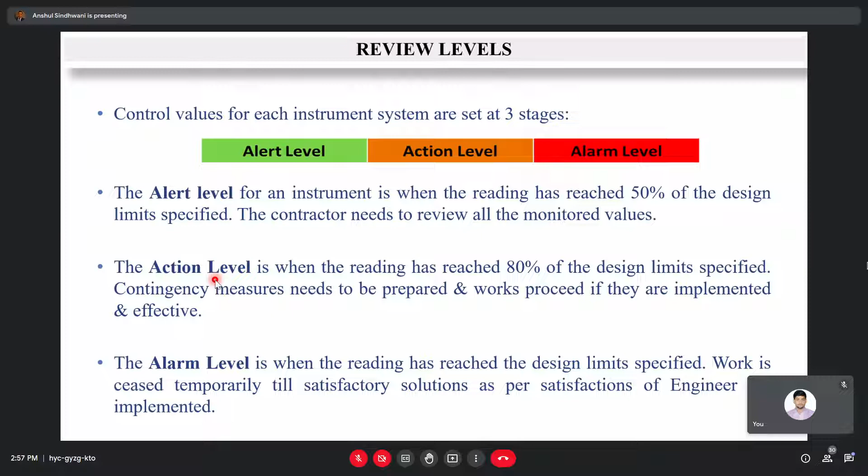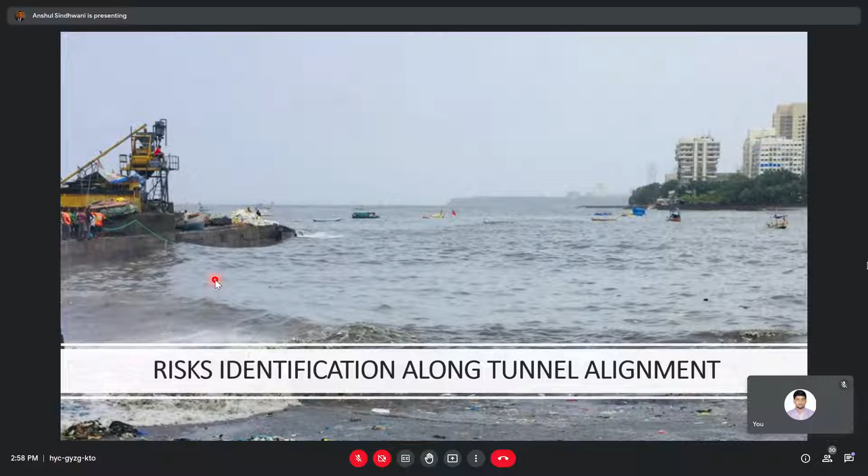So first, I talked about the nearest location to the sea — this is the first vulnerable factor.

Second is borehole location. When the initial alignment is decided, boreholes are done at that stage. But later when the contractor arrives, the alignment may change, so these borehole locations, originally dug along the tunnel alignment, can end up falling away from the actual alignment. From the geotechnical investigation images shown earlier, we understood that as we move forward, and even left and right, the geology is changing. So if these borehole locations shift relative to the actual alignment at a later stage, it can have a major impact.

But what can be done? The only mitigation is to have mapping of the ground during the TBM excavation stage. When we do any cutter head inspection, we also need to have a face inspection at regular intervals so that we do not miss anything.

Vibrations in urban alignment, there are two things related to vibrations. First is the technical part, which we call peak particle velocity. If that goes beyond the contractual or allowable limits, there will be problems. But on the other side, even though vibrations don't reach allowable limits, people still get discomfort because they hear loud sounds and get irritated. So what we need is a dedicated liaisoning team available at surface locations.

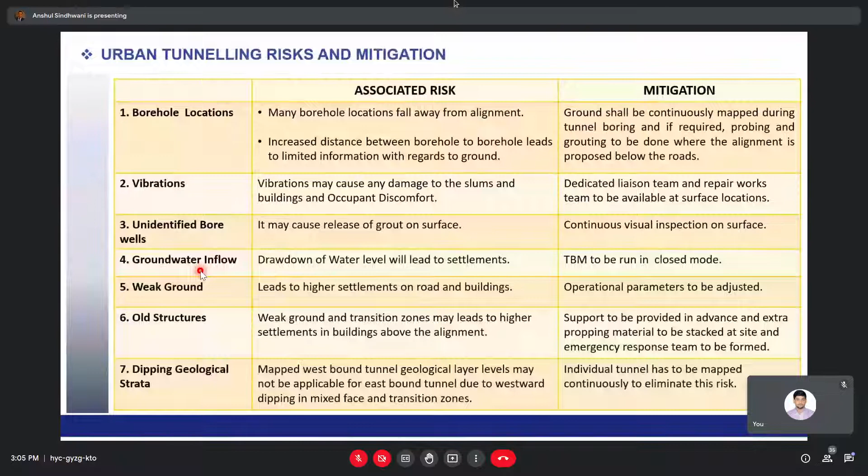So this was all about the urban tunneling main risks which I have specifically experienced. Now I'll compare some challenges with respect to hydro tunneling, because hydro tunnels are much more famous and actually evolved much earlier than urban tunnels. So how exactly do we relate both? Because people who work in hydro tunnels can sometimes face issues in urban tunnels, and the same for the other part as well.

So for vibration limits, what happens in hydro is for an individual blast, the total explosive weight can go up to 1 ton, or 50 kg, 80 kg. But imagine in case of Mumbai, the maximum explosive weight for a single blast can be as low as 2 kg, 3 kg. So this is just the explosive weight I'm talking about.

Now if I talk about PPV, peak particle velocity, in case of Mumbai below the heritage buildings where we were digging a tunnel, the vibrations were as low as 2.54, and we were blasting below the buildings. Imagine how difficult it is to excavate hard rock with such low vibration limits. This is the main difference between hydro and urban tunnels.

Now blasting, I've already talked about this. Within Mumbai, due to these low allowable vibration limits, the number of holes we took for a single blast was a maximum of 8 to 12 holes. If you compare with hydro, full-fledged blasting can achieve production of 2 to 3 meters per blast, whereas in our case we excavated 1 meter advance in 4 to 5 days.

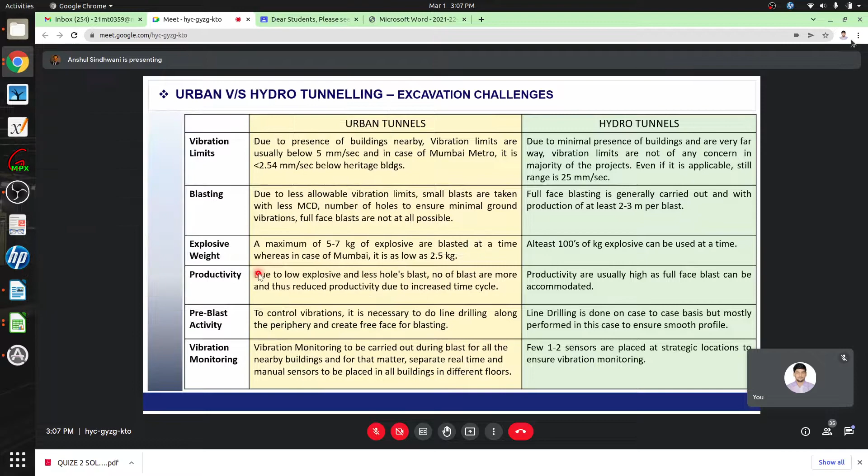Then pre-blast activity, we have done a lot of pre-blast activities. We created a free face through a drum cutter, and we did additional line drilling. Whereas in case of hydro tunnels, it's done on a case-to-case basis, but mostly line drilling is performed to ensure a smooth profile. In our case, we did 102 holes in a dual line category just to reduce vibrations.

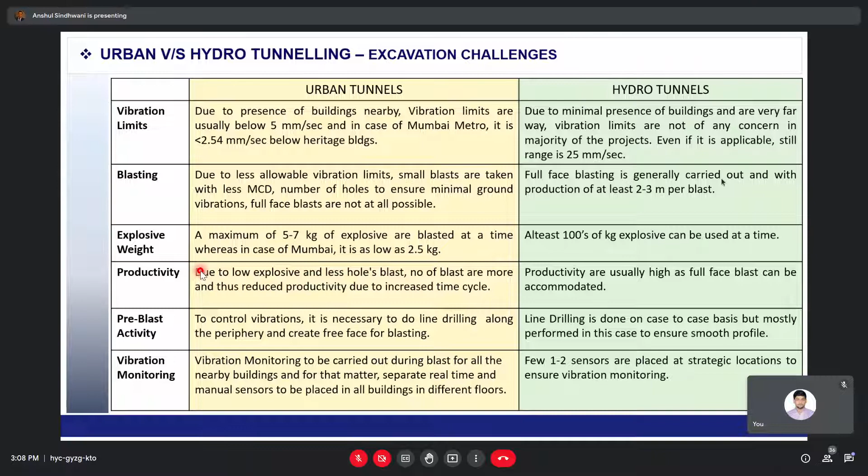Then vibration monitoring itself - in hydro, you just place 1, 2, or 4 sensors at, let's say, 50 meter, 100 meter, 150 meter intervals. In our case scenario, there were at least 8 buildings near the 50-meter zone at the blast location, all at multiple floors. We need vibration sensors on all of them, because if we only monitor the building lying above, vibrations will also occur in the next building. So we need at least 8 to 12 sensors for a single blast. This shows how difficult it is to work in urban environments.

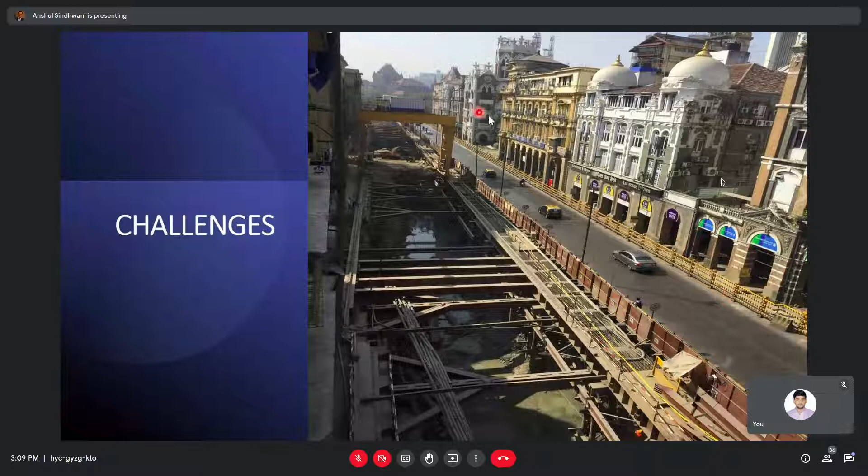I'm going to discuss some specific cases in later slides. So this is one station, I'm just showing a photograph. All along you have these heritage buildings, and when you have blasting below, all these buildings need to be monitored. So one of the major challenges in ground challenges in urban tunneling is water.

With the continuous increase in traffic and population, we know these underground metro projects are becoming more and more important. But these unforeseen geological conditions are a major contributor. Take any project, be it Delhi, Chennai, Mumbai, Ahmedabad, underground ones, everywhere some sort of unforeseen geological conditions occurred, which has caused damage to buildings. I mentioned about Kolkata Metro as well, there was damage to buildings. At least, if I'm not wrong, there were 4 to 5 buildings which partially collapsed, and it affected a lot of people. Ultimately, it results in cost and time overrun.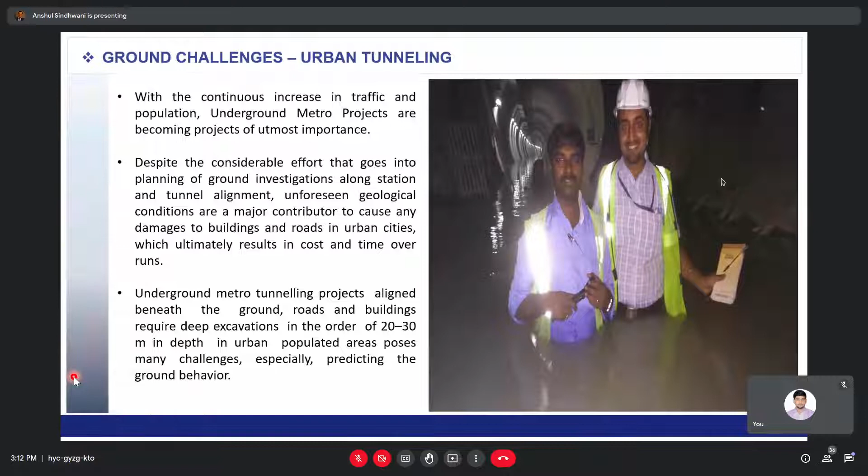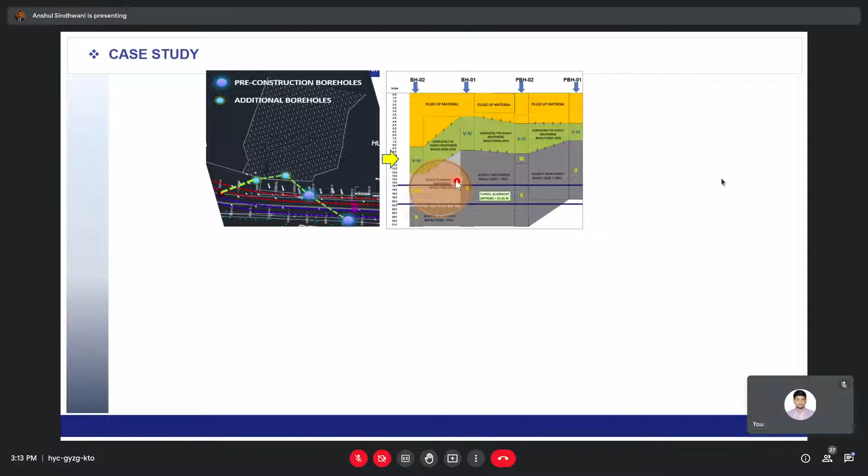If you see the geology, this is just a profile I have prepared. This particular zone indicates that there is a presence of fractured rock material. However, when you are moving towards the coast, these two boreholes basically indicate that the rock is intact - it will not have much problem.

If you see this particular alignment, it is almost 100 to 150 meters. So what we have understood is at least up to this zone there will be no problem in ground, but as soon as we enter this particular zone, this half of it, there can be some problems. Now the problem is identified - there can be a fractured zone, there can be high water ingress. So what to do now? We have done additionally geophysical investigations along this entire line of 150-200 meters.

If you see, we have done both tests, seismic refraction as well as electrical resistivity, because as per my experience, you cannot just go with one specific test. If you have at least two specific tests and relate them with the core hole logging, you will be able to have a better interpretation of the ground anomalies.

So if you see here, there are small fractured zones. Although the rock type is still basalt, there are small fractured zones in between, and these zones become water passages later on when you do tunneling. So if you see this particular image along the tunnel alignment, it's still okay. However, as you move this side, you can see this particular layer is going down.

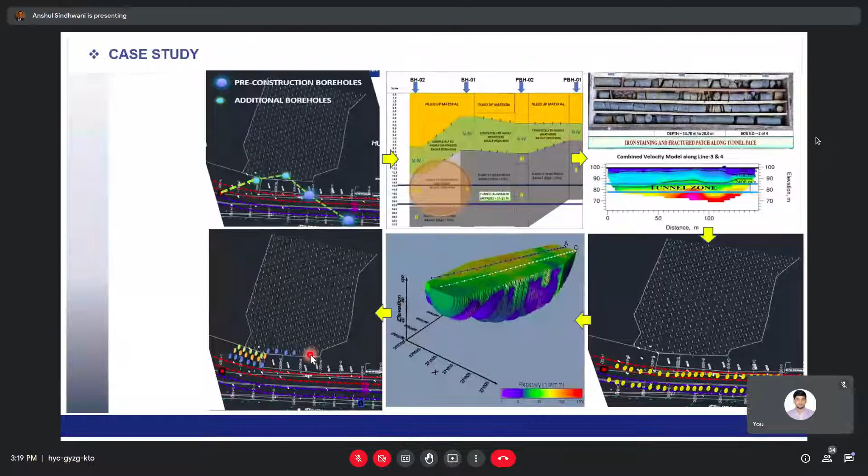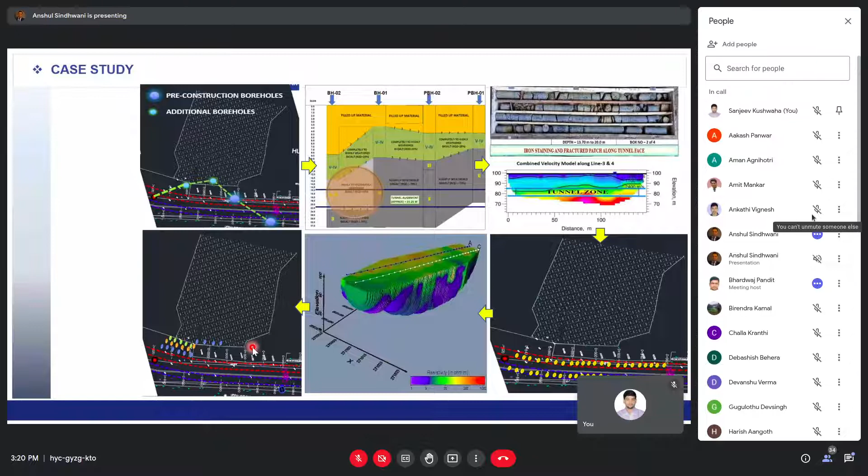Hello. I think Mr. Anshul, your internet has been disconnected. Please everyone mute yourself. Okay, I'll do it, it seems okay now.

So if you see here, we have done this grouting, and there were some indications during the drilling which we were doing for grouting also. I'll just show one video here. You can see a lot of water coming out post drilling. We haven't done anything, this is just post drilling for the grouting purpose. This water was coming out like anything.

So it indicates that there is pressurized water sitting below, because Mumbai, if we go back to history, was initially composed of seven different islands, and later we call it Mumbai. So there is a lot of history associated with it.

But if we relate it to our situation, water is sitting below, and when you disturb it, this sort of water pressure comes out. So Anshul, imagine... Yes sir, hello, I think there is some disconnectivity in between, or the voice is getting feeble. So you can just go into video off mode, and then deliver.

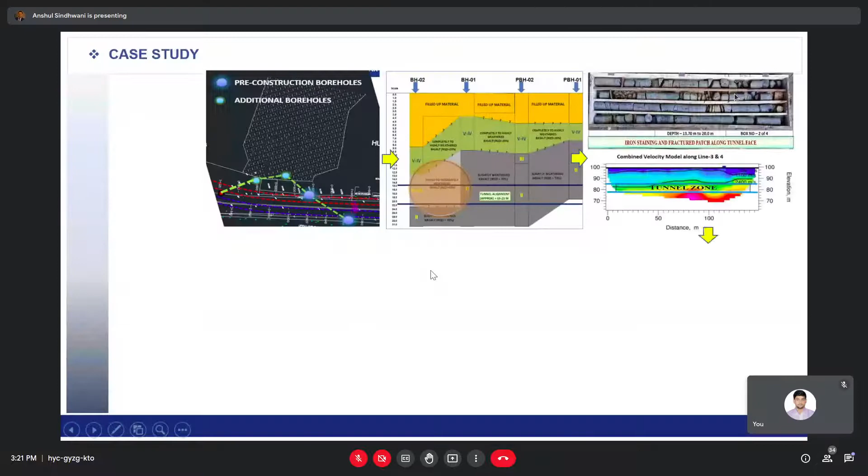It has improved sir now. Yeah, we are able to see now. Yeah it's improved, I think it's okay. You can move a bit. Yeah, can come closer to the mic, or maybe... yeah. Okay sir, please go ahead.

So the point here is, if you imagine the same type of tunneling we are going to do in a horizontal direction, how much water ingress would occur.

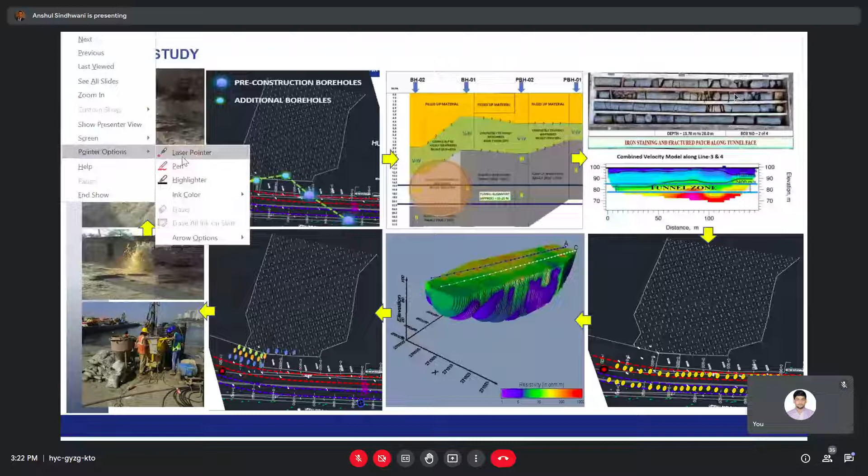So now during the actual tunneling condition, same thing has happened. Wherever we have done this grouting, exactly in this particular zone, there were some water seepages which we have experienced. However, since we were prepared in advance that this sort of problems can come, we have arranged for high dewatering pumps, so that whatever water comes out, we can dewater it at the same time, so that the tunnel doesn't get flooded.

At the same time, we have done the face inspection. So we were well aware that for some part of tunneling, this problem can come. So we were prepared for it, and although it caused significant production loss, we were able to counter it in a better manner. Had we not understood all these aspects and not done anything, it would have definitely created much more problems. That is what we believe.

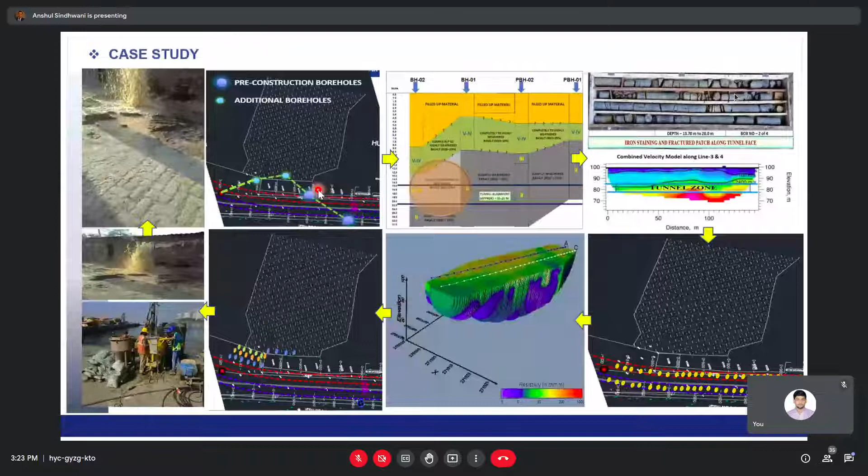So just to conclude on minimizing uncertainty in grounds, specifically for urban tunneling, these are the specific points which I have listed down. Understanding the regional geology is important - until and unless you understand the regional geology, you will not be able to understand the local part of it. Just for an example, I'll take again a Mumbai example.

The shale with tuff bands is quite famous in Deccan Traps. You take any paper describing the geology of Mumbai, most authors are describing it in the same way. So we were aware in advance that this is the sort of geology which can create a lot of problems. That is the reason regional and local geology is important, and then you conduct the geotechnical investigation, because we know in urban areas there are no natural rock outcrops. So ultimately, understanding the regional and local geology will help you in planning the geotechnical investigations.

Now, what happens is many parameters in geotechnical investigation, like spacing of boreholes, depth of boreholes...

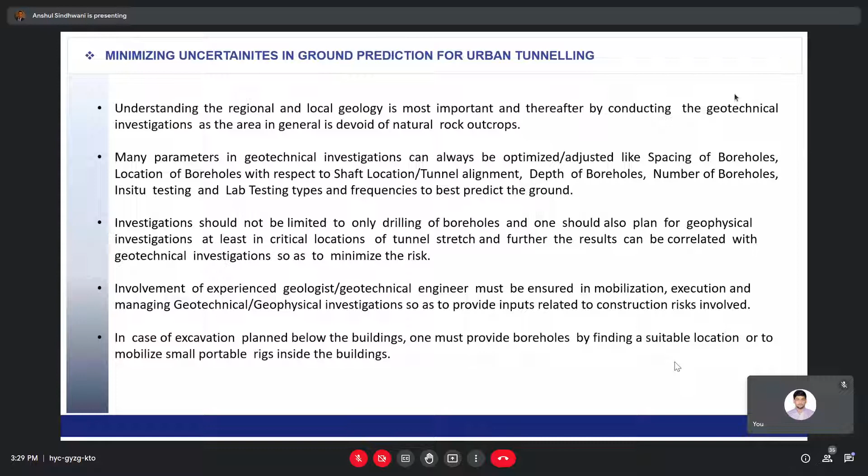This is the last point, after which I'll conclude. The major way of minimizing uncertainties during TBM tunneling is to continuously map the ground. If you don't do it, a TBM operator or tunneling team can say we can dig it, whatever it is. But as an underground specialized engineer, you should always keep in mind that without mapping the ground, nobody will come to know what exactly it is, and it may give some indication of what is coming near the TBM face. If you don't do it, you will miss it, which can hinder the progress.

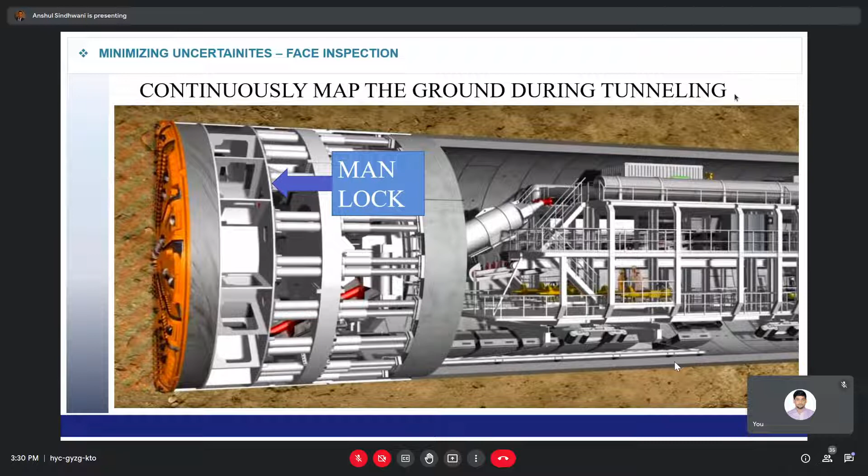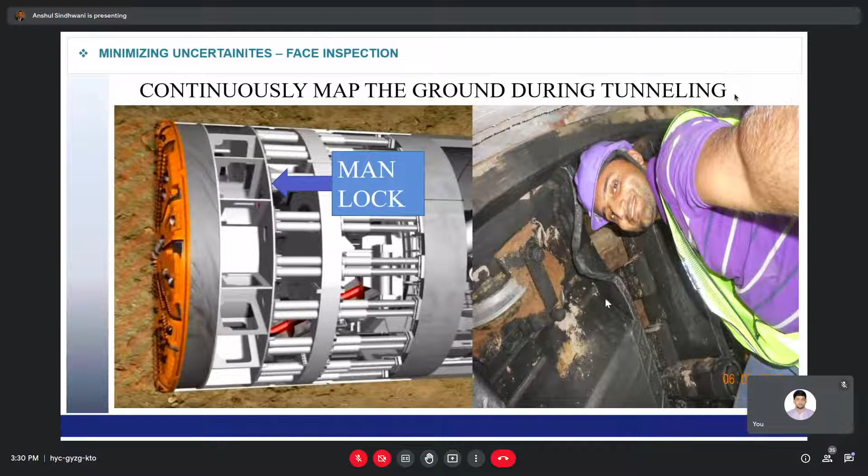I've shown this photo specifically for a purpose. You see the picture where I've taken the cutter head photo - there is a lot of soil here, and the next moment you can see rock. This is a specific case of the Delhi Metro project where we encountered a full face hard quartzite rock. Just 5 meters before, we were getting full face soil, and then suddenly we got this hard rock quartzite of strength 300 MPa. So, like I said, if you don't do it, you will miss it.

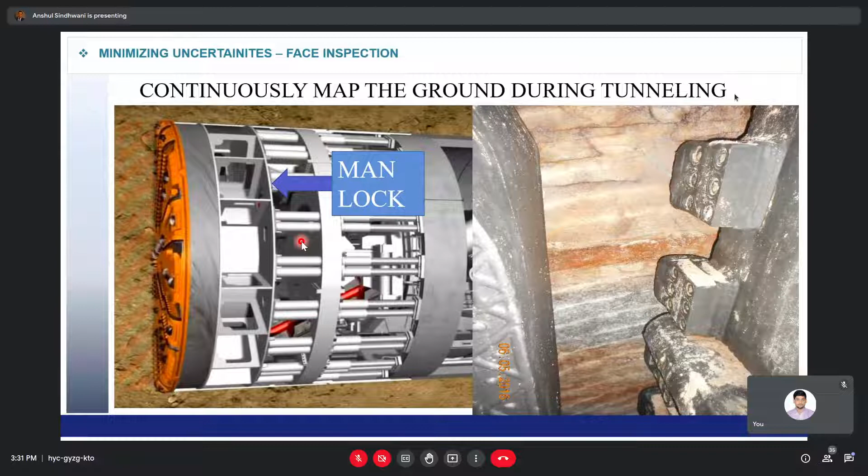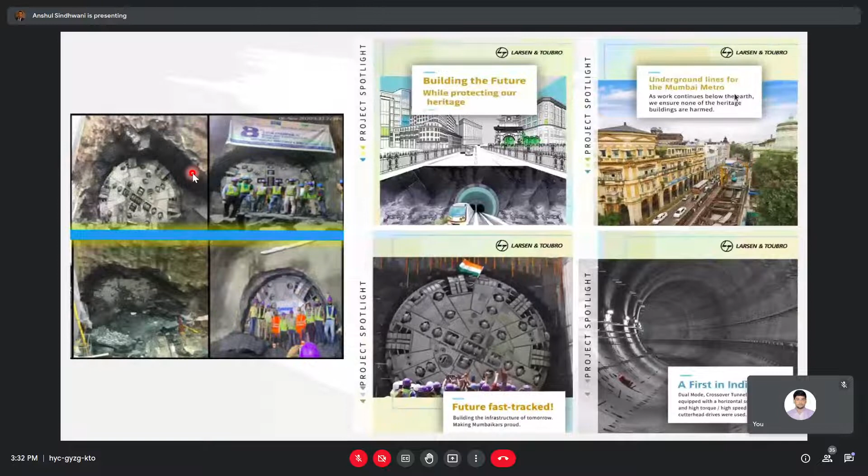If you see this completed tunnel view, we have used a crossover TBM, which is being used for the first time in India. It has a specific feature of horizontal screw conveyor - generally in EPB TBMs you might have studied, we have an inclined screw, but in this case we have a horizontal conveyor screw and high torque, high speed, basically 2-speed cutter head drives, one hard rock mode, another EPB mode. These are breakthrough images - we have already completed this tunneling almost a year back. With this, I would like to conclude. Thank you.